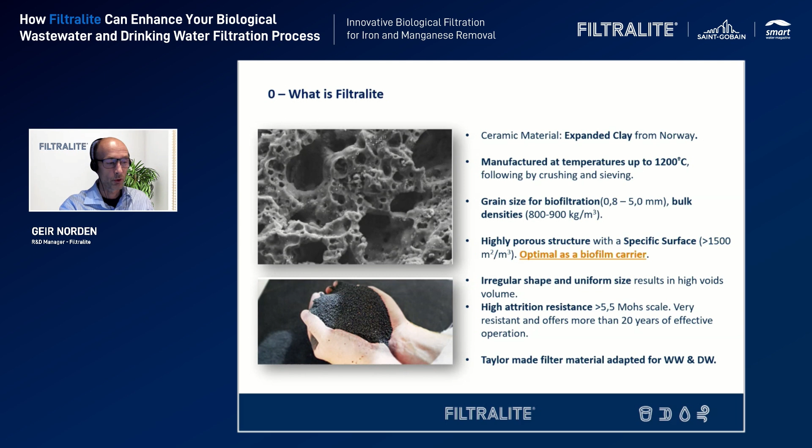As Mohammed also said, this irregular shape and uniform size results in high voids volume, so you can store a lot of biofilm as sludge, giving very long filtration runs. And it also results in a very high attrition resistance, mentioned by Mohammed. The thing is that we can make tailor-made materials perfectly for all types of wastewater and drinking water filtration systems, both biofiltration and filtration.

So when we come to filtration in wastewater, it's mainly two processes. It's what we call biofiltration, and granular filtration, which is also often referred to as retention filtration. We have made some sketches here to illustrate how it's done, but let me instead use words. When it comes to biofiltration, it is typically nitrogen removal. That is the main topic, and we have been delivering this material for 30 years, and it is typically removal of ammonia from wastewater. That is the biggest topic.

Of course, there is also the question of removing BOD, which is biological oxygen demand, or ammonia from drinking water, and sometimes manganese and iron. But the biggest area for our use is in nitrification and denitrification. When it comes to granular filtration in wastewater, it's typically tertiary filtration. That means that the filter is added at the end of a process for a final filtration, either as a monofilter or as a dual filter.

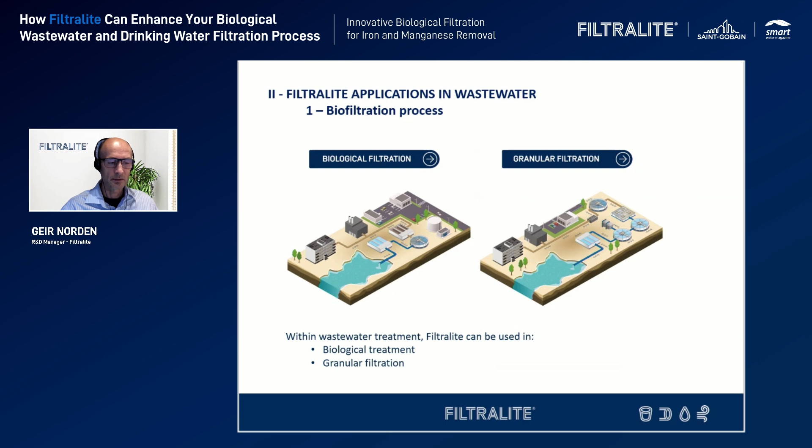And then the Filtralite function for wastewater, as it does for drinking water, simply has the role of attracting grains and keeping them in the filter until it is backwashed. So this is a typical model of a biofiltration. It's typical, not always, but very typical, that the raw water is coming from the bottom, generating an upstream system. And it's also typical that it's a monofilter and not a dual media filter for biofiltration.

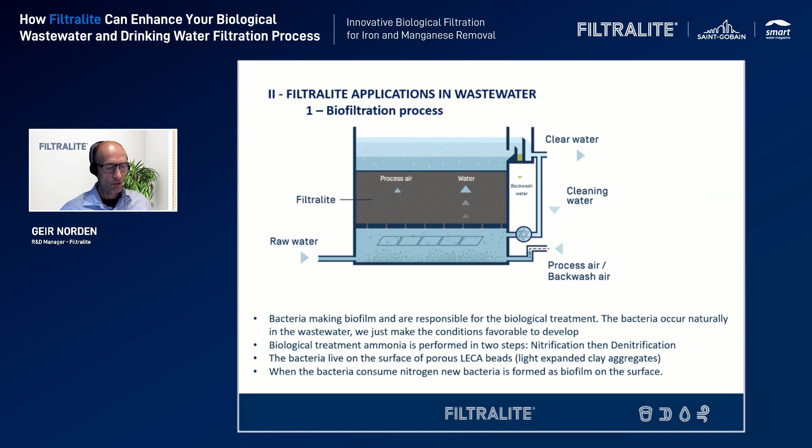So the bacteria then make a biofilm and are responsible for the biological treatment. These bacteria occur naturally in the wastewater, and what we do with the filter material is just to make perfect conditions for them to grow and develop. Biological treatment of ammonia is done in 2 steps, nitrification and denitrification. And when the bacteria have consumed ammonia or whatever they want to remove, they will continue to grow as a large biofilm, which is backwashed regularly.

The typical process for removing ammonia is a dual process. It's both nitrification and denitrification. The nitrification takes place in large aerated filters, which are filled with Filtralite, typically a Filtralite called HC 2.5 to 5 with a very large surface area. In step 1, we can see that the ammonia is consuming oxygen and generating what we call nitrite. And the second step of nitrification is to take it from nitrite to nitrate, again consuming oxygen.

And what is important to notice here is that this process consumes rather much oxygen. Actually, 1 gram of ammonia consumes about 4.5 grams of oxygen. And this is the reason that nitrogen removal has been so important, at least in our world, in Europe, for several decades. It is that the nitrogen in the form of ammonia consumes oxygen, and this is a problem for the recipient.

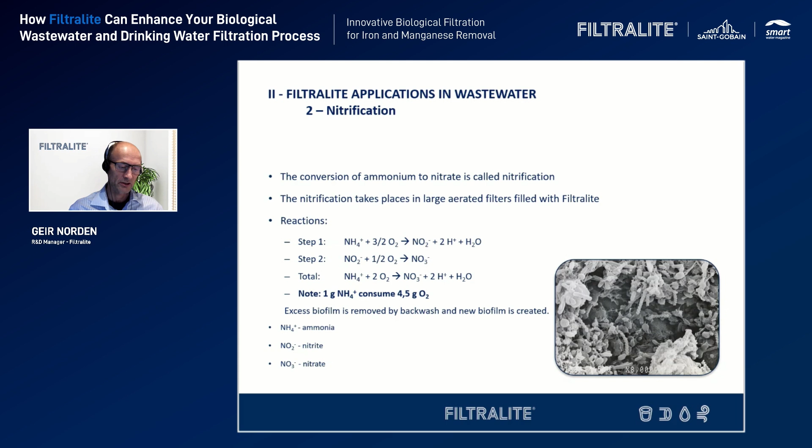The excess biofilm is removed by backwash, and it's very important to note here that when you backwash such a filter, the biofilm is still attached to this porous surface. So what you actually remove is only the excess sludge, the excess biofilm.

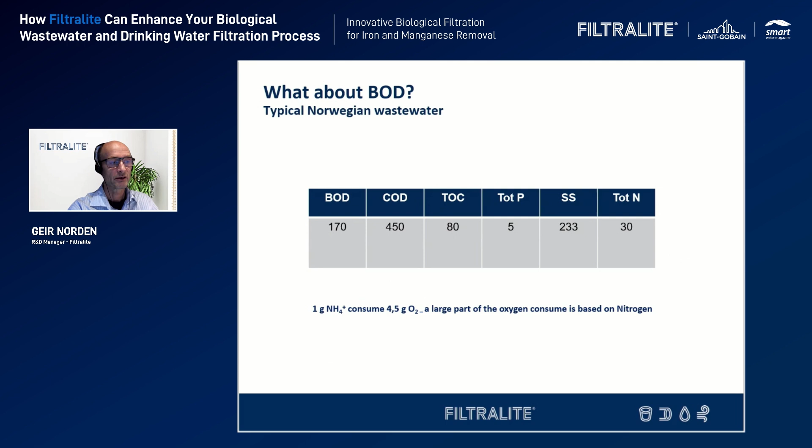So I said that 1 gram of ammonia removes 4.5 grams of oxygen. In this case, I just show you a typical Norwegian average wastewater. And you see that when you have 30 grams of nitrogen, where most of it is ammonia, and you have a consumption of 4.5 grams oxygen per gram ammonia, it contributes a lot to the total biological oxygen demand. Actually, so much that if you want to handle oxygen demand, you actually need to remove nitrogen.

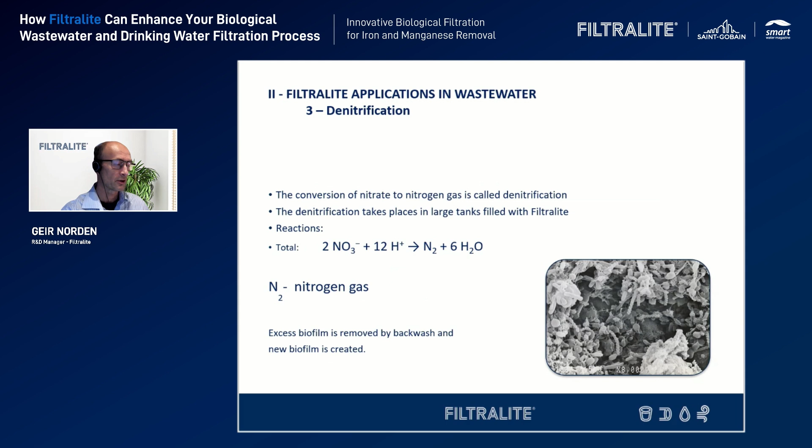The second phase of the process is denitrification, and then you take the nitrate and reduce it to nitrogen gas. And this takes place in a second reactor where you have less oxygen available. And same here, the excess biofilm will be removed by backwash, and new biofilm will be created on the surface of the aggregate. So it's a 2-step process. One is aerated, the second is not aerated, and in the second one we typically use a Filtralite called HR 3 to 6 or HR 4 to 8.

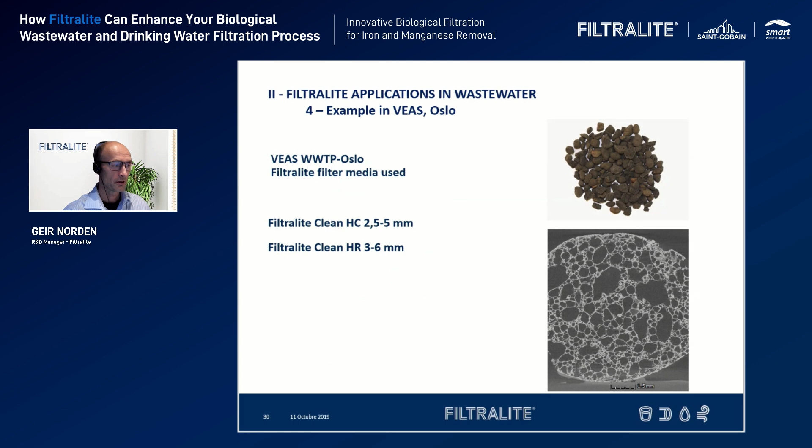One example. The first plant we actually supplied to was in Oslo. That was the beginning of Filtralite. It's 30 years ago. And the 2 products that I mentioned were actually developed 30 years ago for this specific process. And this process has been existing now for 30 years. It's still fully operational. The filter material is still functioning in the filter. It's not been replaced. Of course, we have added a little bit because you lose some over the years, but not very much.

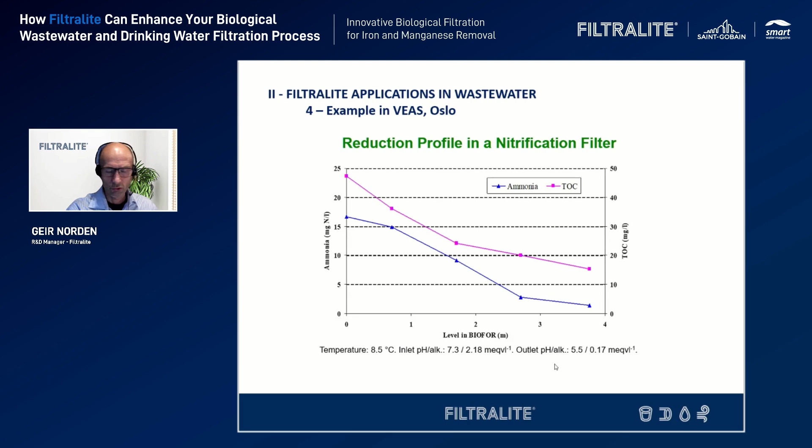Interesting to see is also, here it's measured as TOC, that you have the same reduction for organic carbon together with the nitrogen in the same reactor. Also note that the pH is falling through the system, which is important to consider when you are designing such a system.

Another case study in Dalian, we have a requirement of BOD5. Here we have used Filtralite, and I think it was 2.5 to 5 HC. The requirement was less than 10 milligrams per liter on BOD5, and we actually achieved 3. COD less than 40, we achieved 30. Suspended solids requirement was 10, we achieved 8. And ammonia requirement less than 5, and we achieved 1.1. And you see the inlet figures in this column. In total, 12 filters for BOD, COD, and suspended solids removal, and 12 filters for nitrification.

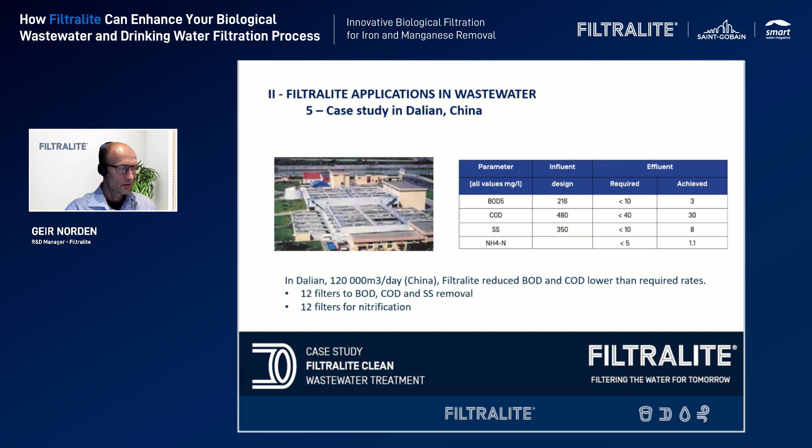Another case here. In this case, we are supposed to remove TOC, comparing Filtralite Mono-Multi and anthracite-sand at 2 different velocities. At 5 meters per hour, Filtralite removes, in this specific case, 50%, while anthracite and sand remove 37%. But if you triple the water velocity, increasing it from 5 meters per hour to 15 meters per hour, you see that the Filtralite Mono-Multi is still performing very well, while the other solution with anthracite and sand is not performing that well anymore.

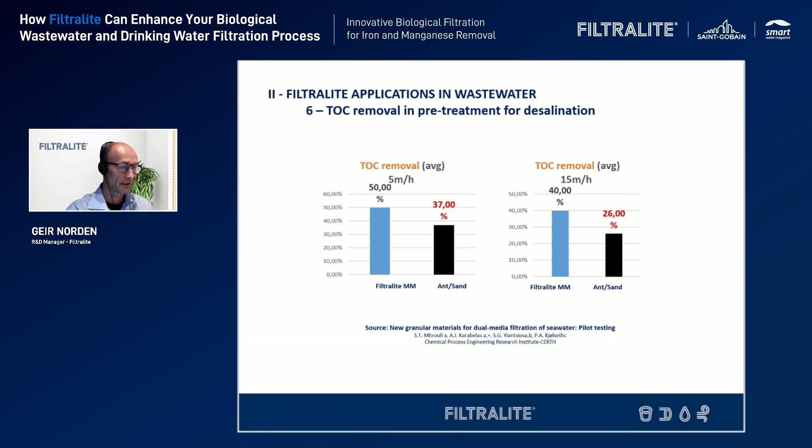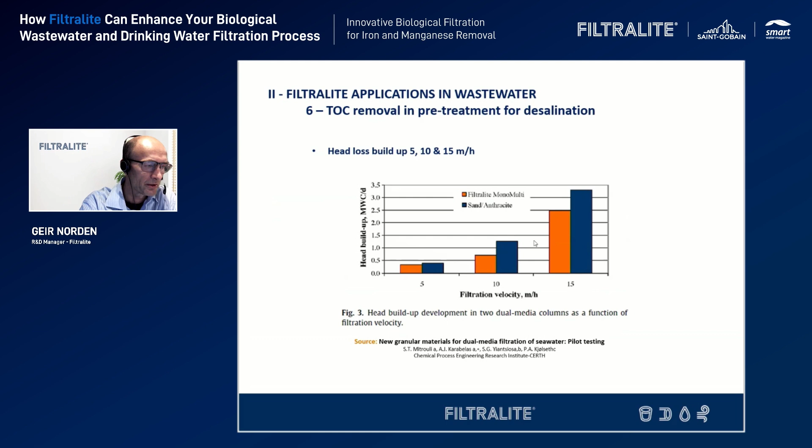In this case, we are comparing Mono-Multi and sand. It's the same case, but it's the head loss buildup for 5, 10, and 15 meters per hour. And we see that the head loss buildup for sand is considerably higher than for Filtralite, particularly at the high velocities.

Next step, and here I have a little problem that I cannot remove the Zoom headline from my presentation, but I will try to take it anyway.

In this situation, we are going to remove iron, ammonia, and manganese, typically from drinking water, and this can be done in the same reactor under specific conditions. And it's 3 different chemical reactions. Iron is removed from iron 2+ via oxygen to iron oxide, which is very similar to rust. And this is an oxidation, precipitation, and filtration reaction. That means that on the surface of the filter material, you will have oxidation of iron. Then precipitation will occur, and the precipitated product will later be filtrated in the same filter system.

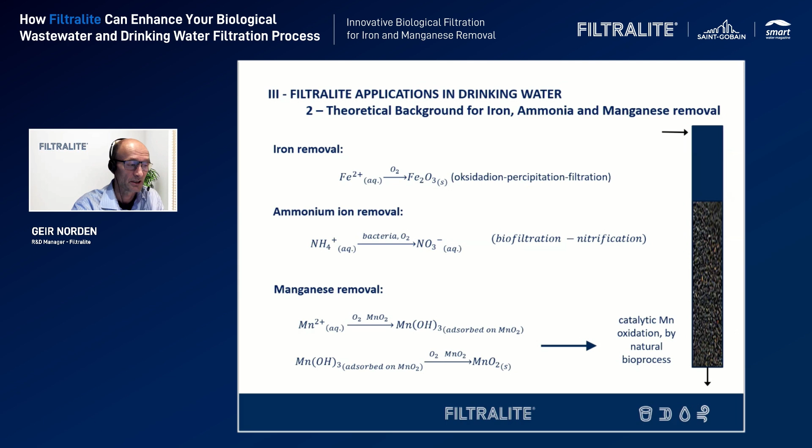Ammonia, as said, is removed by bacteria and oxygen, which is called biofiltration nitrification. And manganese removal is a much more complicated reaction. It is an autocatalytic manganese oxidation, which is a kind of bioprocess. So it's a kind of biofiltration process that goes through several steps. And what is important for those steps is that you need to adsorb some of the manganese on the surface and generate a biofilm for biofiltration. So in a typical downstream system, it is essential to ensure that the iron removal layer is as short as possible from the top of the filter media.

This is because iron and ammonia need to be removed before the manganese process starts. That also requires a rather deep bed, because you first need to remove iron and ammonia before you can start with the manganese. The necessary conditions for manganese removal in a combined system are that there is sufficient aeration of raw water. Oxygen is needed for a second step of the oxidation mechanism.

Effective removal of iron prior to manganese removal. Development of the catalytic layer in the natural work-in method. Elimination of disinfectants in the natural work-in method because of working of the bioprocess. Ensuring optimal pH, it has to be above 7, and regular backwash.

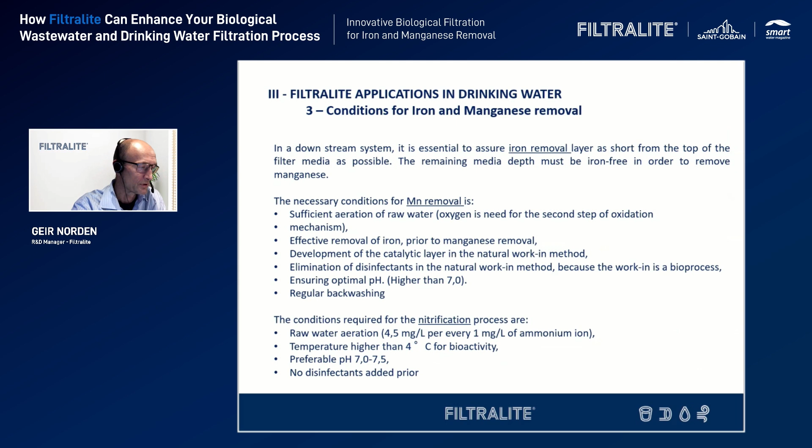And the conditions for nitrification are that the raw water needs aeration. It needs quite much oxygen. Temperature should be above 4 degrees, which I don't think is a problem in the Middle East, and preferably a pH of 7 to 7.5. So we have an example here from Poland, Nentech in Poland, and they did a really good study on a combined removal of iron, ammonia, and manganese in the same reactor.

And if you look at the gray line, I hope it's gray on your screen as well, you see that the iron starts at 1.6, and it reaches the actual limit for iron here at 0. This is the depth of the reactor, and you see that the iron is removed down to the expected or critical value after only 40 centimeters. If you look at ammonia, it is more or less the same. It's the green line. It is removed to the expectation at about 30 centimeters from the top. The rest of the volume in the filter reactor is used for removing manganese, which needs a lot more space.

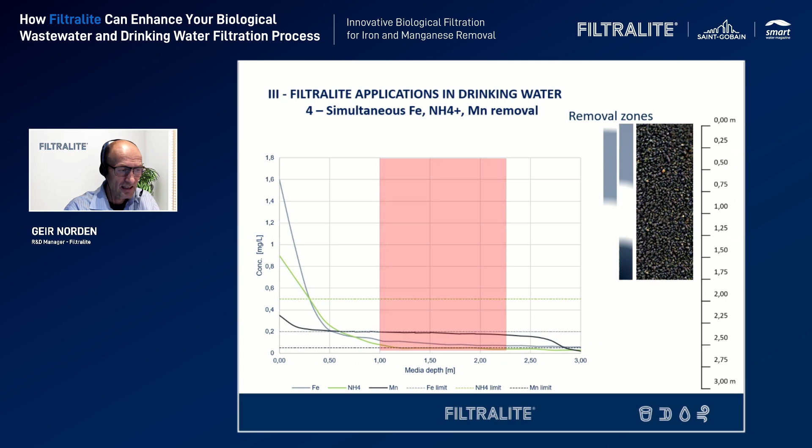What happens with manganese is that already after 20 centimeters you have some reduction, but then it takes a rather long distance in the filter, so it needs a rather large filter volume before it reacts completely. Only after 2.8 meters depth is the manganese removed. So what this tells us is that it's fully possible to remove ammonia, iron, and manganese in the same reactor, but the reactor needs to be rather deep to manage this.

This is a case study together with Acciona, and in this case we had to remove high ammonia content at the drinking water site, reduce OPEX, and handle ammonia peaks up to 7 ppm. It was done in a biological aerated filter system. The filtration speed was from 10 to 12 meters per hour. Inlet water was between 1.5 and 7 ppm of ammonia and above 6 ppm of BOD, with high turbidity and high suspended solids.

The water requirement was that if the inlet was below 2 ppm, the result should be less than 0.1 ppm of ammonia. If the inlet was above 2 ppm, between 2 and 7, then 90% removal was expected. And Filtralite met all the requirements with satisfaction. So it solved the problem.

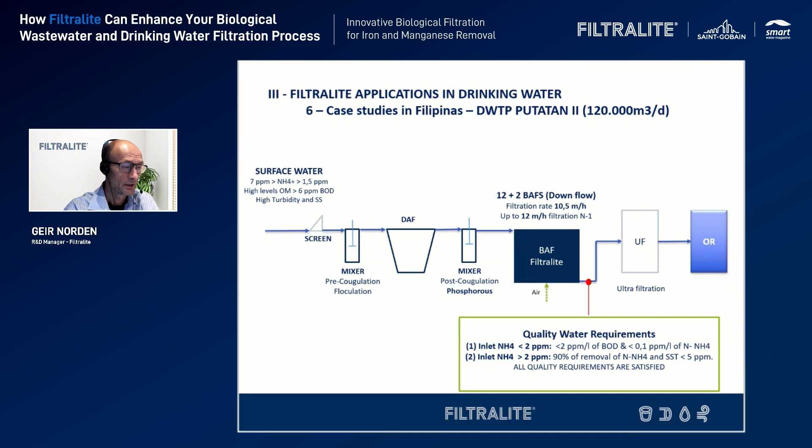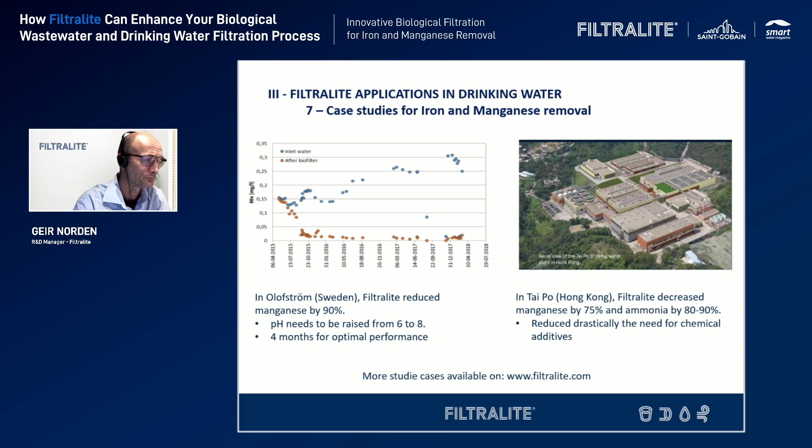So if we sum this up, the efficiency of the biofiltration process has a great dependency on the carrier properties. Filtralite offers a large porosity, which makes all this possible. Large surface for biofilm growth. High void volume, which means lower head loss and much better storage and retention capacity. Longer filter runs are achieved due to the large void volume. The light density makes easy installation, affordable transport, but also very affordable backwash.

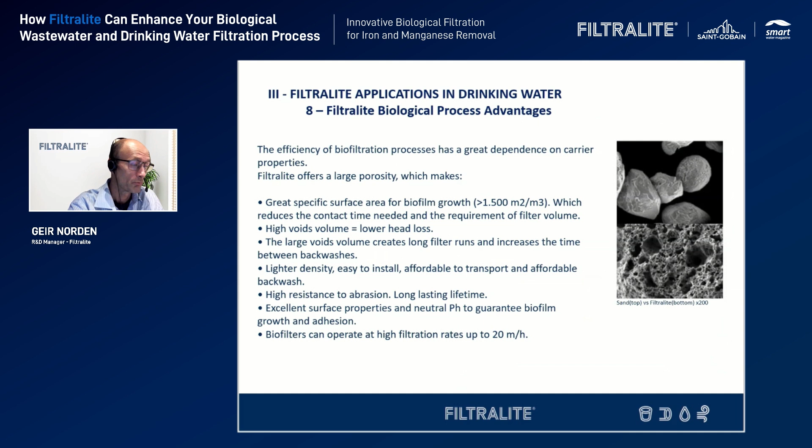And of course, if you design a new system, you can achieve lower investments due to smaller pumps needed when the material is light. High resistance to abrasion gives a long lifetime, which can be proven with a 30-year-old plant. Excellent surface properties and neutral pH guarantee biofilm growth and adhesion, and biofilters can operate at high filtration rates up to 20 meters per hour, which is more than twice that of typical sand and anthracite in the best case.